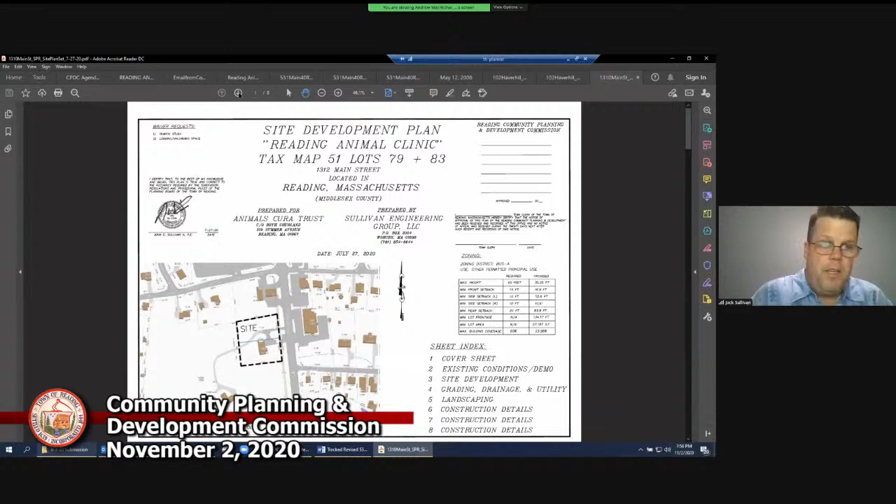Right now there's a gravel driveway that extends through the vacant lot, the northerly lot where the proposed new building is shown. That gravel driveway extends through the property and goes out to a single family home out back. The land behind this property is a totally separate property that has nothing to do with it. Beth has no ownership rights in it. She just owns these two properties in front of us.

But right now there exists an easement to allow that single family home water and sewer service through this property, and access. We need to maintain those services and that access until such point that a future development by someone else is put in. So there have been talks with the potential developer of that site, and we tried to coordinate our plan.

I think the confusion is the developer would like to run the larger water and sewer services through our site, which we accommodated an easement for. But as far as drainage, there's no drainage being combined between the lots at all. All the drainage for this site is self-contained on this property, and there's no increase in flow rates exiting this property. We need to show that pre-existing levels of flow will not be exceeded, and that's why we have on-site drainage systems to mitigate the increase in impervious surfaces and collect stormwater on our own property.

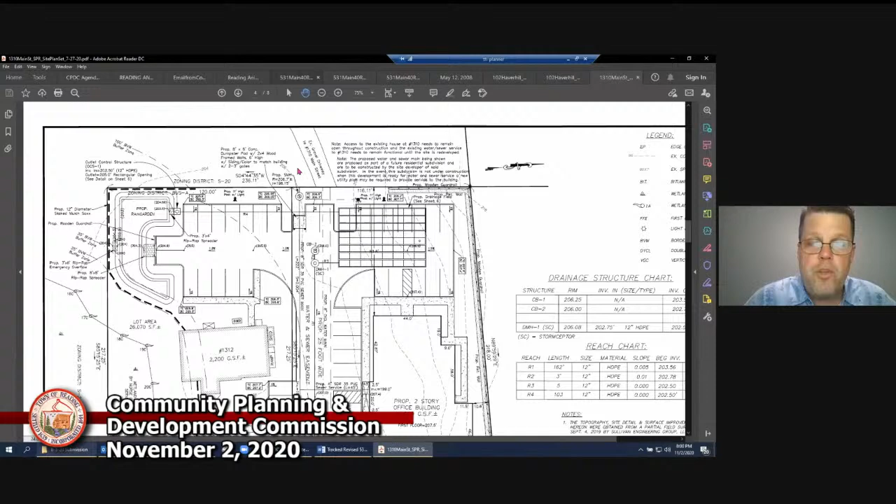Okay, so I'm sorry that I'm having a hard time understanding. Are you putting in the 8-inch water lines now or not? Not now. Only if the development gets approved in the future behind us. The developer would then put in the 8-inch water main and the 8-inch sewer line. If it does not go through, then those will not be put in. I appreciate your patience with that question. Thank you. Sure.

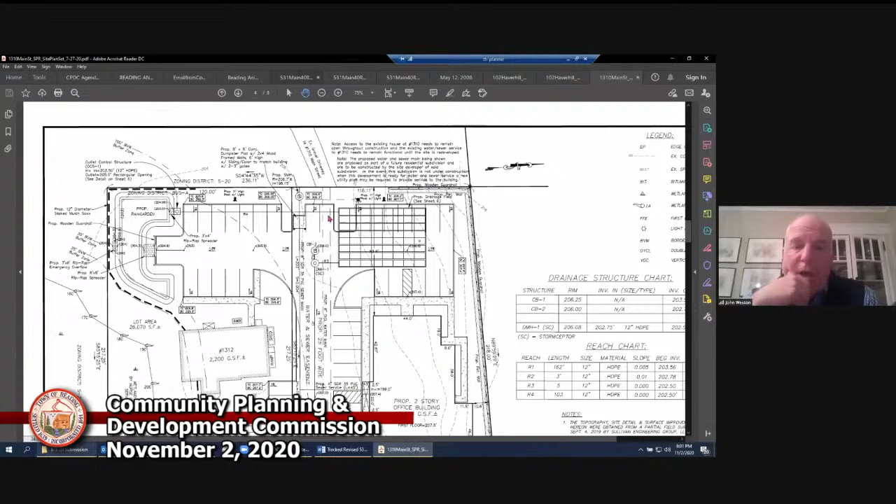Turn it back to the chairman. All right, thank you, Catherine. So, other questions? Yeah, Catherine, it's fine, right. This is a complex process, I know, especially when there's these two overlapping.

And so I'm understanding from this meeting that there is a minimum requirement of 47 parking spaces because of the zoning. It was kind of vague on whether or not the vet's clinic expected to fully use 47 parking spaces. And I did not really receive an answer on how many animals they expect to have at a time on the property. Could I get some general feedback on how many people coming and going on a daily basis, and how many animals entering and leaving on a daily basis, would be happening on the facility?

We're required to have 44 parking spaces under zoning. We're providing 45 conventional parking spaces and 2 handicap spaces, for a grand total of 47. The conventional parking spaces for everyday use will be 45, and we're required 44.

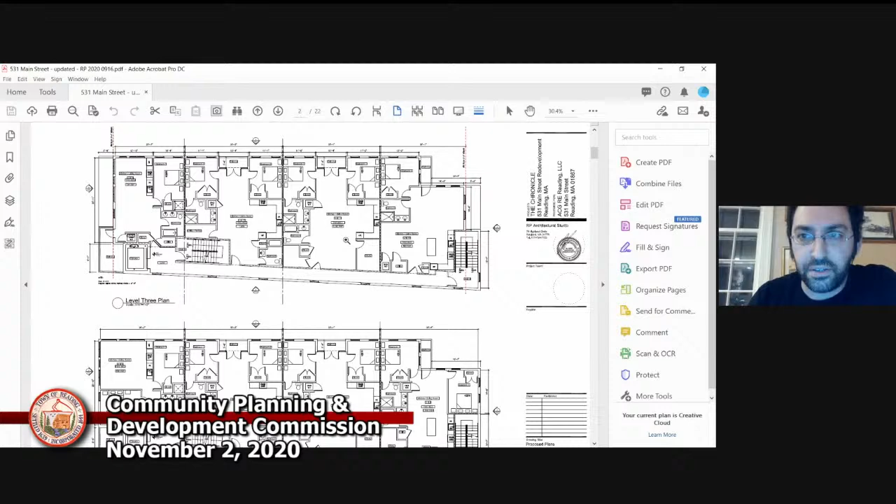This unit on the end became a large 1-bedroom, and similar to the front, we have a 1-bedroom now as opposed to 2 bedrooms. But aside from that, it's very similar. And again, as I mentioned, the 4th floor is now gone, so the building massing has been improved quite a bit.

As you can see here, we have the Chapin side elevation. So what we basically did was take off the upper floor, so now we only have 2 floors above the retail area. We brought the scale of this down a fair amount to make it more of a pedestrian scale. The aesthetics of the building are very similar - we're still having the clapboard and the reveal panel system above, but otherwise the aesthetic is very similar.

At the front elevation on this side, again similar aesthetic. We just brought this roof overhang down a bit to make this a little bit smaller scale, but again keeping a lot of the same aesthetics we had in previous schemes. Same thing on the rear - just the scale got a lot smaller, but we still have the rear patios and balconies. So similar design, just a smaller scale.

So looking at the alleyway side here, again the aesthetics are basically the same, just a smaller scale.

Moving on to some of the renderings. By taking off this upper floor, the scale of the building is much smaller than it was in the last schemes, which we think is a pretty large improvement in that regard. But overall, the design is very similar to what we showed last time.

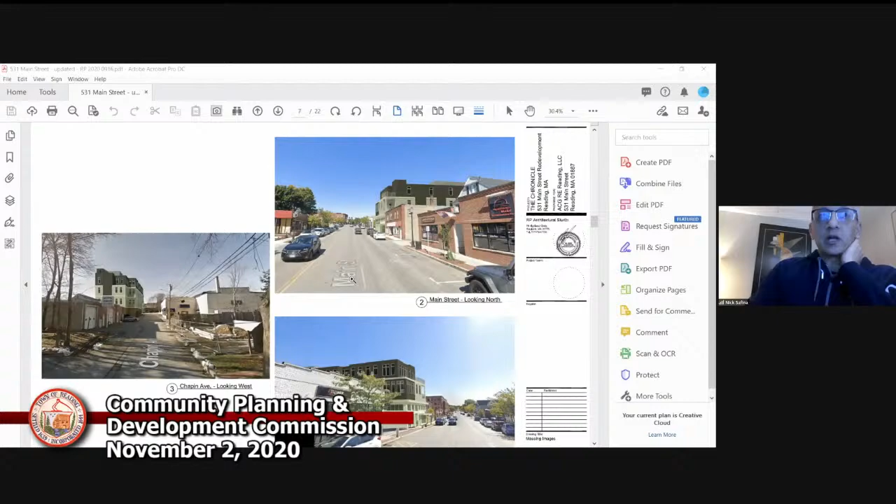Do you want me to share my screen again, Nick? Yeah, if somebody could share that. Okay, here, I'll share it. So it looks like you pulled back the building wall and you're going to have an overhang with some column supports, and that created more of an alleyway for these meters.

I'm just not sure you have code clearance in front of the meters right now, at least the way they're sketched up. The gas company said we needed 30 inches off the property line, so that's basically what we're intending there.

Well, but 30 inches off the property line doesn't give you 36 inches in front of the meter, which I think is the code required clearance, so you might have to move that wall back. That's not what they talked to me about when I was on site, but even with that said, we have room to push that wall back a little further if we need.

So if that's the case, we need 36 inches in front of that meter. We can match that. I think somebody should look at that just to be sure, so you don't get caught. Yeah, that's fine, we'll work out that detail.

And it looked like you had the bare minimum OSHA clearance between the column and the wall to get in there, at 22 inches or so. We might have to open that up a little bit, but we're pretty close. I really would like you guys to look at that to make sure you don't get caught and have to find a new home for them or make some significant change. But it looked like you did have room to move that wall left. Yeah, we have space, definitely.

My other comments are more architectural. I think I'll hold off on those until we hear from other people on more of the site planning stuff. Sure.

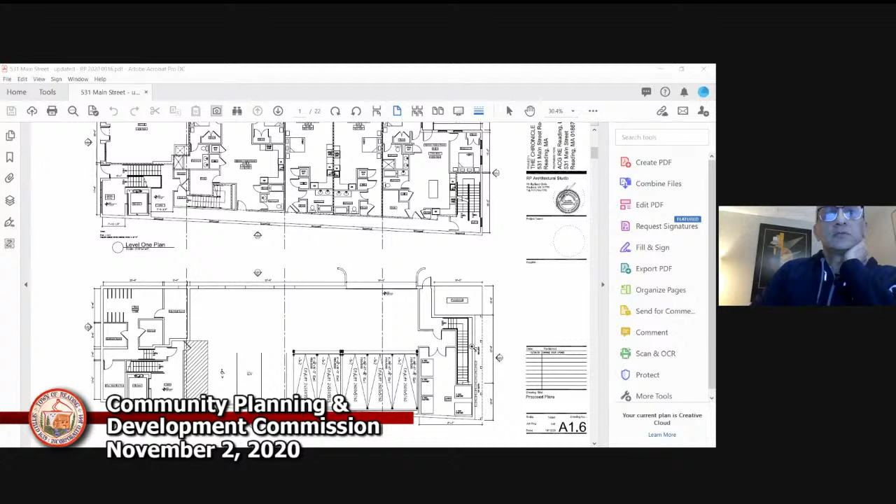Hey Ryan, I'm sorry, Aaron, could you possibly show the plan that you did of the meters? Sure, yeah, I can do a blow up. I have, let's see here.

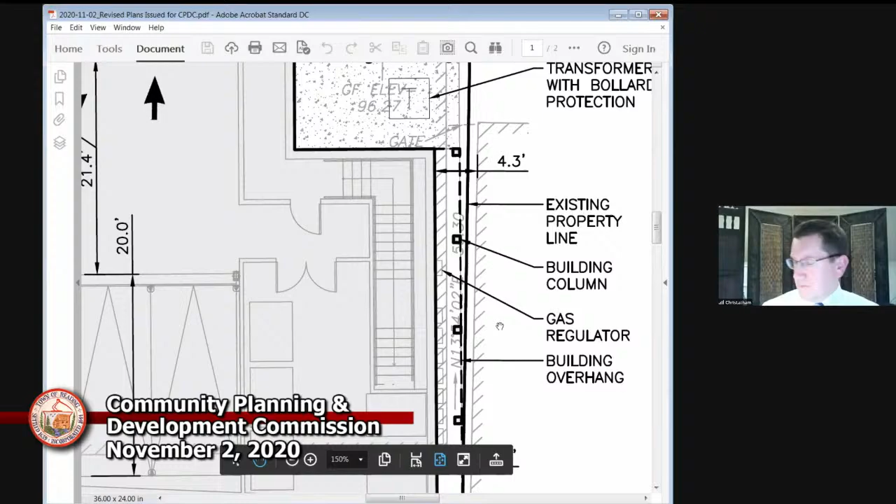There's actually, isn't there a better sketch than that? I thought, hold on. Yeah, there is, let me see. I'm trying to figure out the best way to, I'm going to try to share my screen if that's all right. Where is it? Okay, can everybody see that? Yep. Okay, Aaron, why don't you take over if you want to describe the plan.

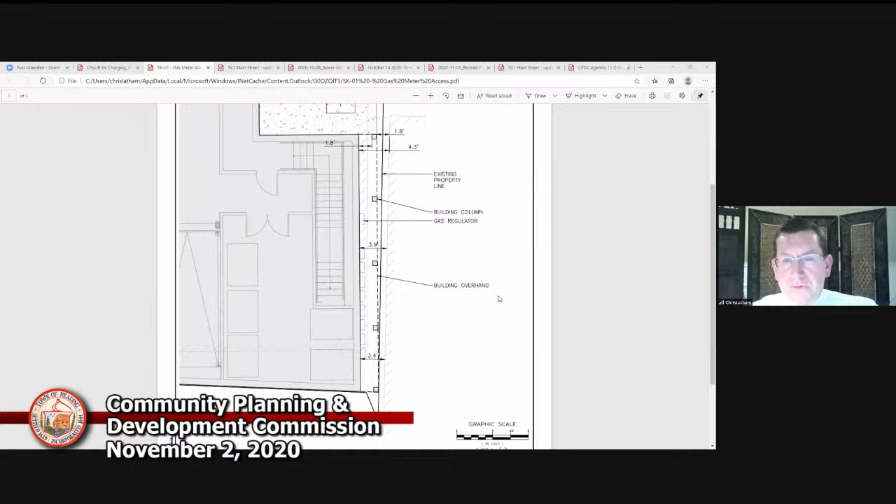Sure, yeah, we just pulled together this sketch as there was concern about the access getting back here. So we pulled some dimensions from building to building to show that you have 4.3 feet up near the transformer, and down towards the bottom of the screen, 3.4 feet at the last meter. You can see the dashed line is the building overhang line. The building columns are hatched right along that line. That's about it. The gas regulator is the first square, you can see the text called out at the gas regulator. So I think that's about it with this sketch.

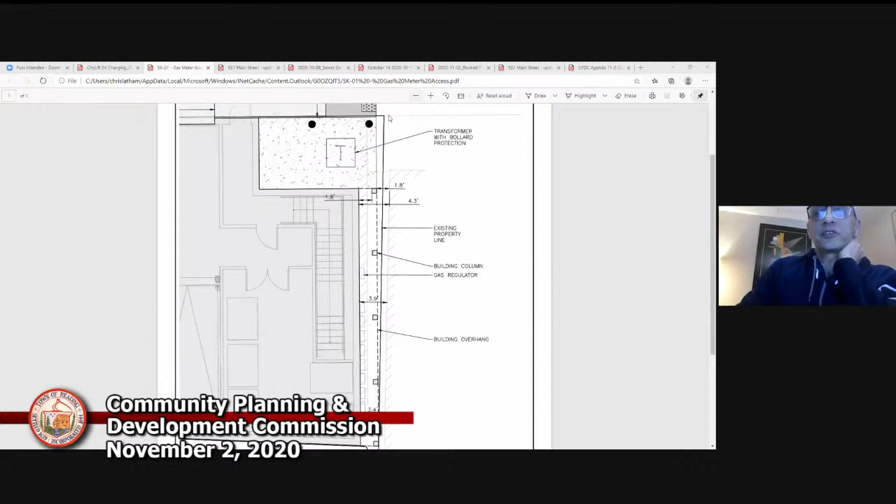So if it's 3.4 feet from building to building, and the face of the meter is almost 12 inches off the wall, how are you 3 feet from the property line? It was 30 inches from the property line, was what I was told. 2.6, yeah, but I don't know. When I read the code, it just says 36 inches. Okay, well, we'll revisit that to make sure we're accurate. But we do have space to push that wall back if need be.

Rachel, do you have comments? I think my only comment was about the street parking questions. I didn't see them addressed in this, and maybe I'm just not picking up on it. One of the things we had talked about, coming back to this, is whether we were going to consider some street parking options given the retail establishment in there. So am I just missing this because I'm not awesome with the architectural plans, or is that being dealt with separately?

Basically what we submitted is what we had. I mean, obviously we had proposed a more formalized plan, but the PTTF basically decided they didn't want that on that side of the building. They actually made a decision that they would rather have less parking and less loading zones. They want more sidewalk, so we're sort of stuck. I mean, obviously we have the zoning bylaw, with Julie's suggestion we moved the EV space onto the CityLift. We added an extra electric vehicle charger, which opens up one additional standard regular parking space inside the garage. So we are incorporating that for that commercial space. So I think that's frankly the best we can do. We downsized the size of the commercial space.

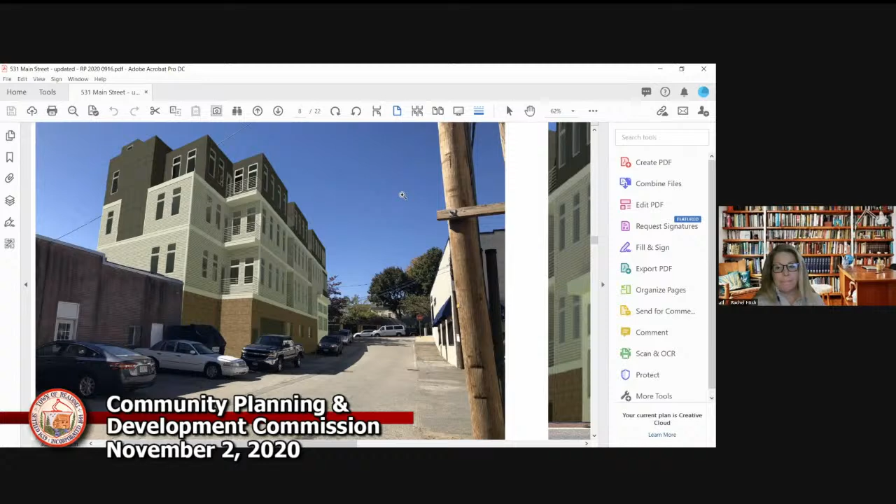Well, let's think on that. Come back to it.

Other thoughts? Mr. Chairman, while we're on parking - how many spaces do you say the city lift is going to generate? That would basically be 13 parking stalls with the CityLift.

All right, so the 3x3 would generate 8, and the 2x3 would generate another 5, 13, okay. I just wanted to make sure you weren't counting that extra space, because it looks like they're two technically independent CityLift systems, each one requiring an empty spot to be able to function. That's correct - the 2x3 has 5, 1 less than 6, and the 3x3 has 8, 1 less than 9, for a total of 13 stalls.

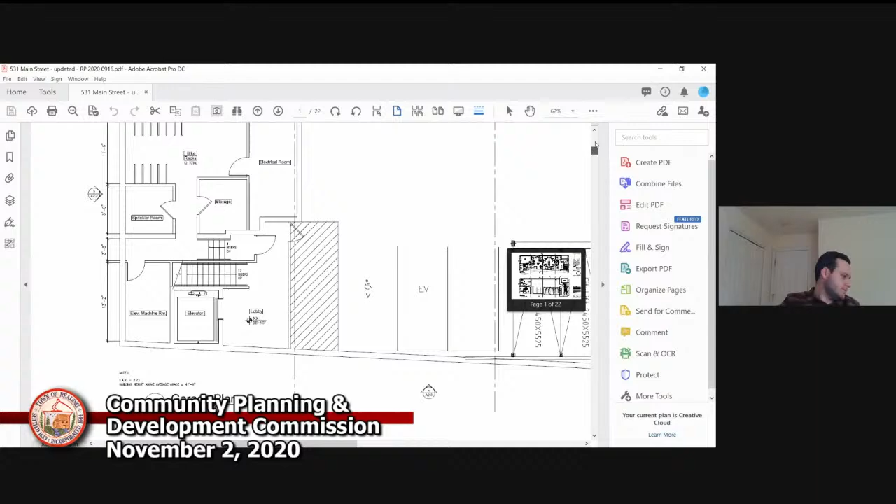Okay, thank you. And if we could go back to the gas meters for a moment, on the SK-01, if what I saw was that the opening is 1.8 feet on both sides of the column, was that correct? I believe so, yeah.

So to get in, you're going to have to go onto the other property. Is that what you're saying? Potentially, yes. Like I mentioned before, we do have room to make that wider, so I think we can increase that opening so no one has to walk on the other property to get to the gas meter. Okay, because that's a very small opening, 1.8 feet. Yeah, no, I understand. Okay, I guess.

And while it hasn't been brought up yet, when this is all said and done, would it be possible to get a shadow plan of the new building with the new height? Yeah, I actually included that in this drawings package. I think it was the last sheet of the original package that was sent through. I could bring it up if you'd like to see it. If you can, for the group. Yeah, sure.

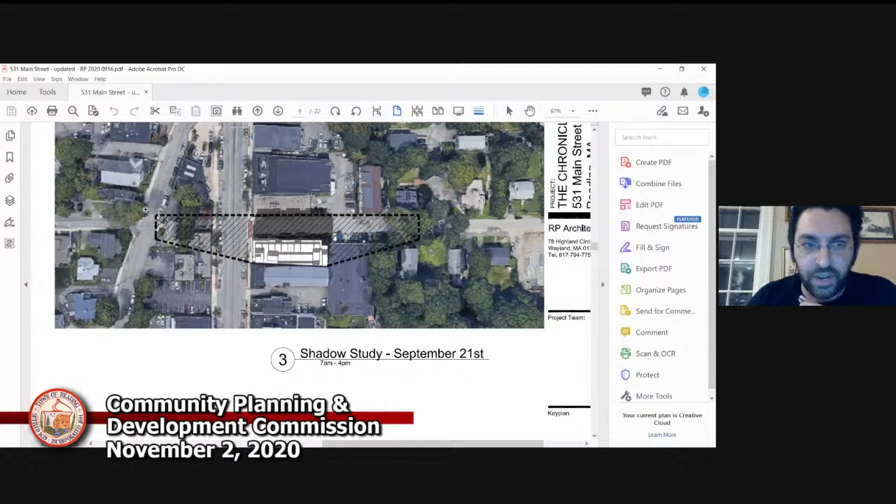You've cut out, can you hear me now? Yep, okay. So I was just saying, when we took off the 5th floor, we lost some shadow along this area for all these different times of the year. So we saw some improvement overall. You've cut out again, it's very difficult to hear you. Sorry about that, can you hear me better now? Yes, okay.

So anyway, I was just summarizing that with the 5th floor taken off, all these shadow studies improved. The overall footprints are very similar to what was originally submitted. But as was brought up by the neighbor last time, the building across the street is still going to have shadow on it because we're tall enough to be over that building, which is fairly close.

Okay, thank you. I have another question, and in addition to the parking concerns, I don't know the answer to that, so I'm glad the task force will take another look at that. I like what you've done to soften up the streetscape, the main street side a bit.

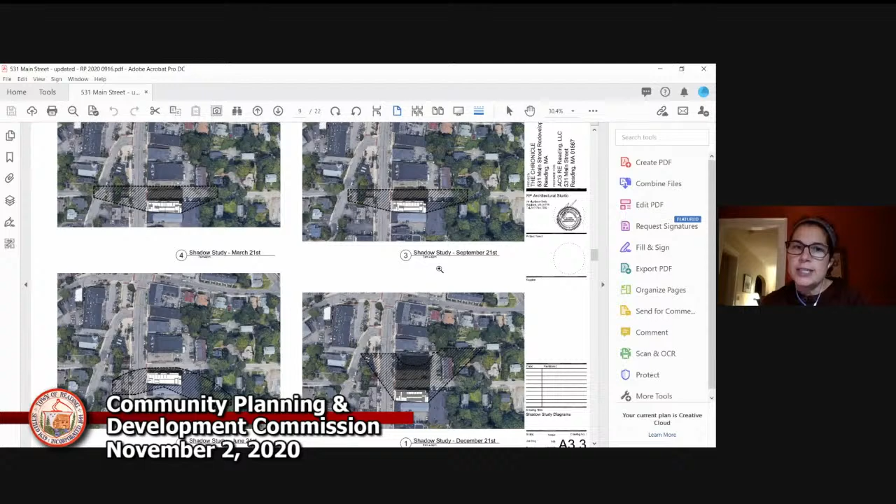Different question. A few meetings ago, we discussed whether the retail space could accommodate equipment, hoods, etc., that would be necessary to have food service be an option if there were going to be a small cafe or something like that. Is that incorporated into this design? Yes, we did incorporate a shaft space for an exhaust, so you could have a cooking space in there for the hood. That's basically this X area here, and it would run up to the roof, so we considered that.

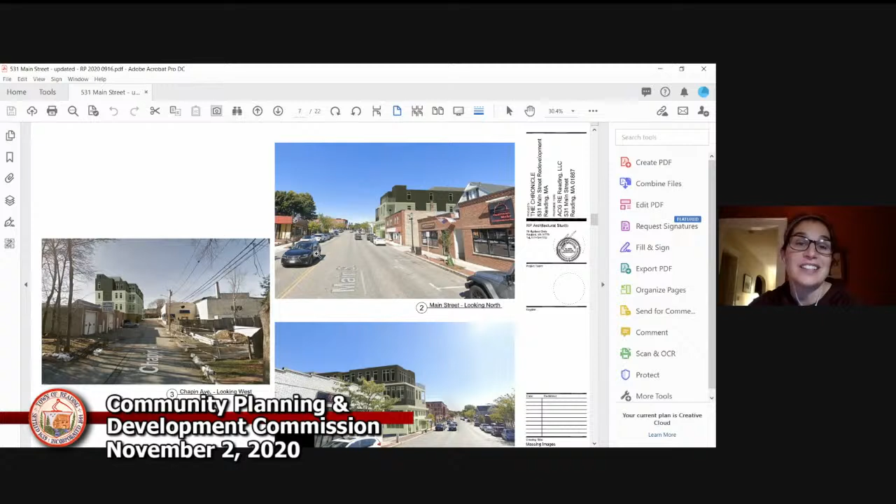I do appreciate how you've softened up the Main Street side. I'm still really concerned, I don't know the answer to it, about that long, relatively uninterrupted big length on the Chapin Avenue side. With the renderings, which I appreciate you did, it's still very much the dominant feature on that portion of the street for quite a stretch. I've been looking at this and I don't know if there's anything else that can be done, but it's still really big from that one view and very dominant.

You're talking about this elevation? Yes. Yeah, I mean, we've broken it up with the balconies and tried to use different materials to bring the scale down. But it is a 4-story building.

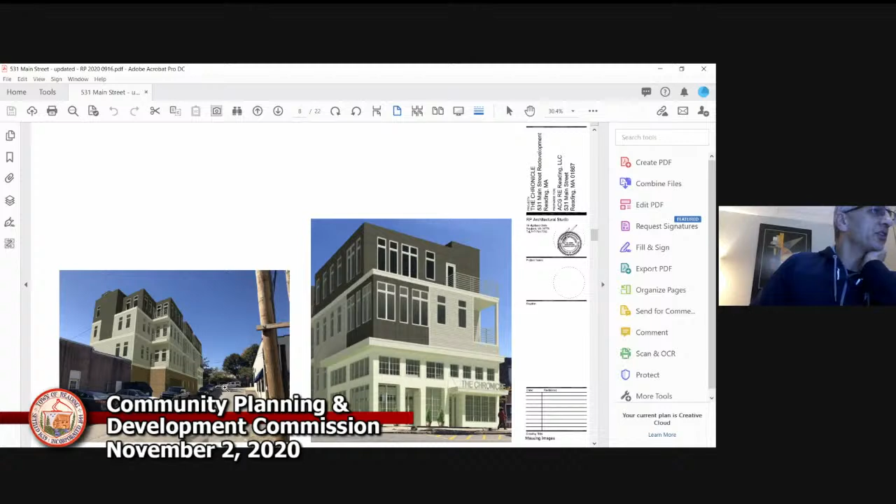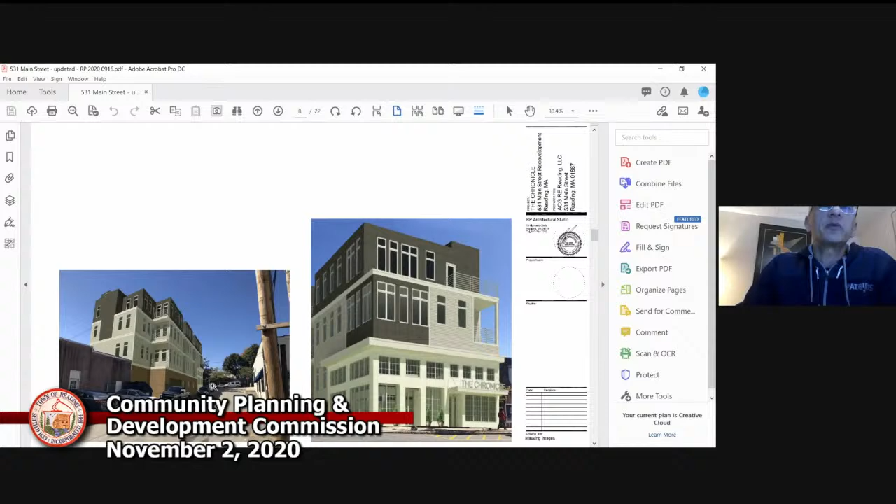One thing you might consider there is the balcony areas that have the recesses - it looks like they're recessed. Correct, they're recessed, yep. So you could either darken those elements up or push them back further. You might want to continue that recess slightly into the brick below so that's not a long face. I think what's happening is those balconies, especially the top one, in the rendering, if you zoom in, because it's not recessed significantly, it's reading like a big long band. But yeah, sure, we can steal some space there and push those in to get them off the street a little bit. Also, if you change the color of the band across the face of the balcony, it'll stop the continuous length we're perceiving. Sure, you can look at that as well.

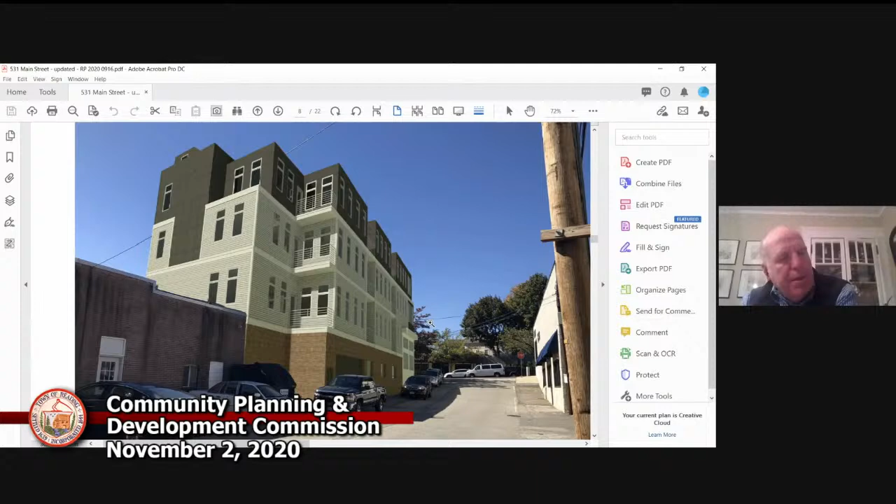So can we talk about the height? A couple of things. One is I see on your plan set, I think the top elevation numbers are wrong. They don't calculate quite right. So you'll want to take a look at that.

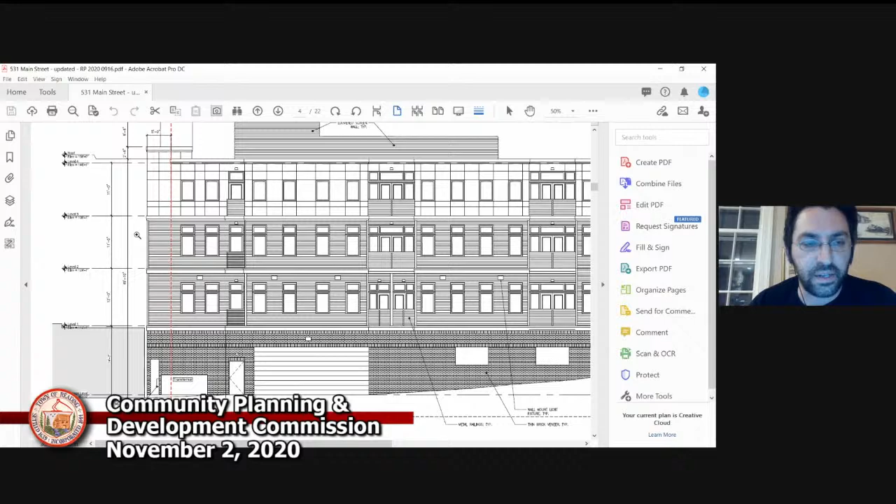Right, because you're showing it at elevation 158 or something like that, and I know that's not right. Oh, these numbers, yeah, maybe. Yeah, the actual dimension itself is accurate, but that might not have carried over. So I guess, first of all...

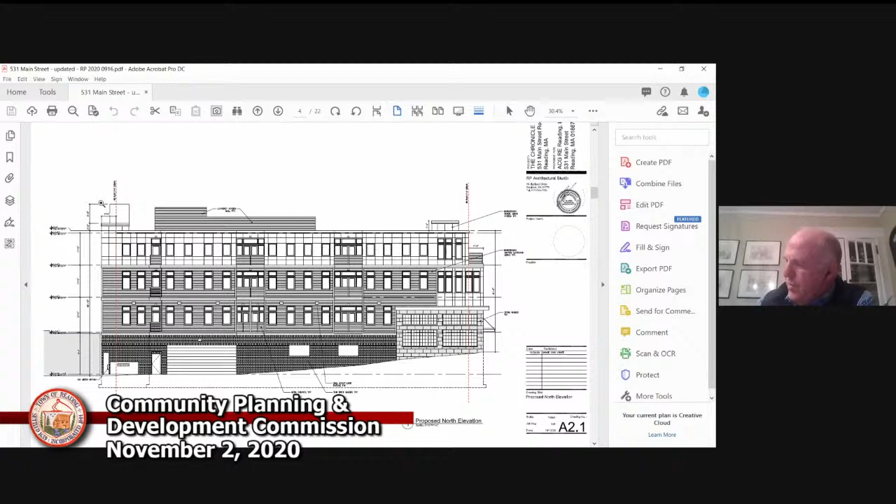understanding how you calculated the average grade. I guess, so that I'm not beating around the bush, I'm still concerned. I mean, obviously you lopped off a story, which is huge, but you aren't even in the ballpark, as I've said both meetings, that you weren't in the ballpark the first two times around. I'm still concerned over the height because the way I see this, at one corner you're still at 58 feet above grade, above the corner grade, right?

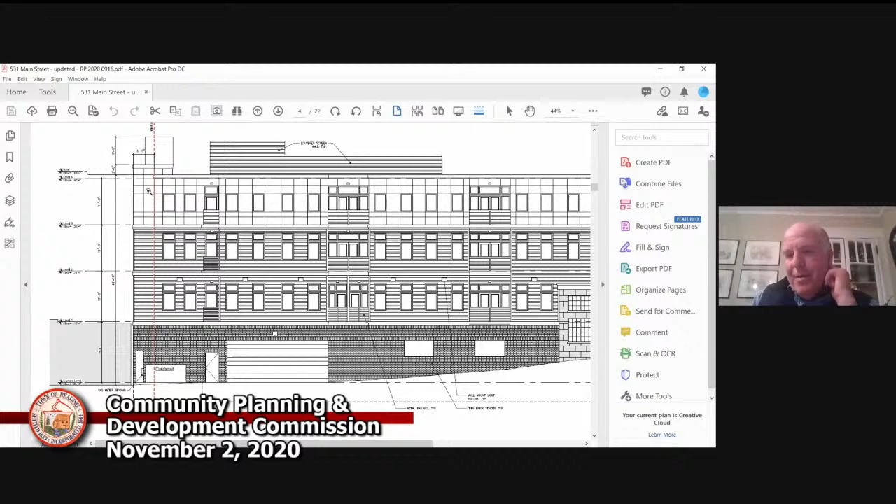At the lowest grade. The lowest corner is on the rear by the transformer. Yeah, to the top of the living space is 49. No, the top of the building. And so I think that's where we need to work that out. The way we define building height isn't necessarily to the top of the living space.

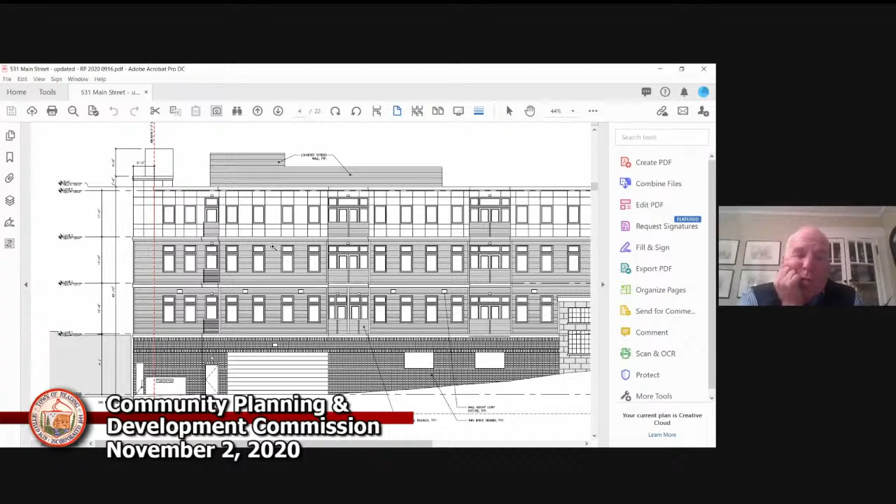So Chris, if you can go back and look at the definitions in the zoning, we do include parapets in the definition of building height. What we don't include is like elevator shafts or what have you, right in the center. But when I look at this, because of the way you've designed this, if you show a different one of the elevations, the building facade is right, it isn't interrupted in some of the...

That building facade is not interrupted at the top. This is setback, this is setback, this is not setback, right? Stair is not at the... and so that's what we're looking at, right? That's what I'm looking at. I'm looking at that's 58 feet from that grade to the top of that facade.

Now, understanding that's not the way we measure, we measure from average grade, which is why I first asked for clarification of how you got to that average grade. Was it the four corners, or taking the perimeter in CAD, or what have you? So I'm still concerned about the elevation, because it's still above our 45 feet, even at 47.

But because of the way the design is, to me it even looks like in some places it's another story above that, right? 58 feet. So, you know, I'm concerned about that.

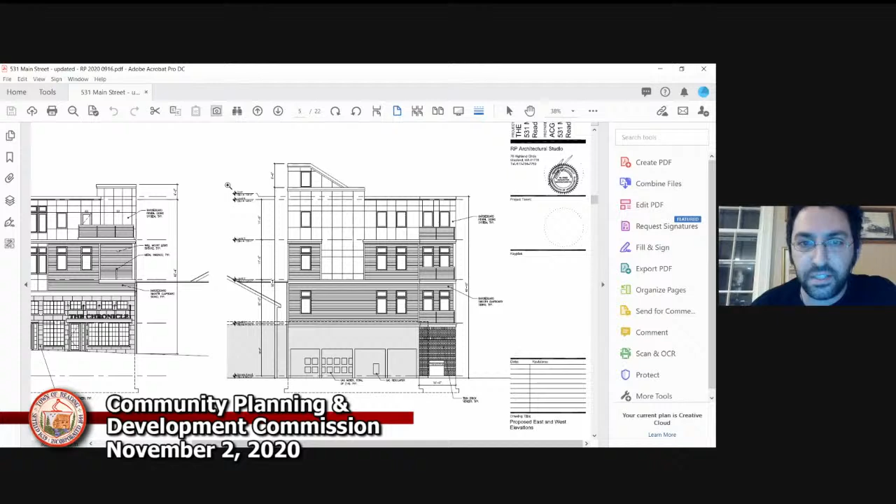I mean, we've met the setback requirements at that top floor, I just want to point that out. And yeah, we are certainly over the height, but in most of the locations we're very close to it or under it, depending on the grade. The only spots where we're really quite a bit over it is just at this stair area in the rear corner. Or the front, it's 2 or 3 feet, but on the front elevation too, in that corner, right?

Yeah, the one that you can see right there. Yeah, we're slightly over. That's set back quite a bit from the street. Yeah, it is over.

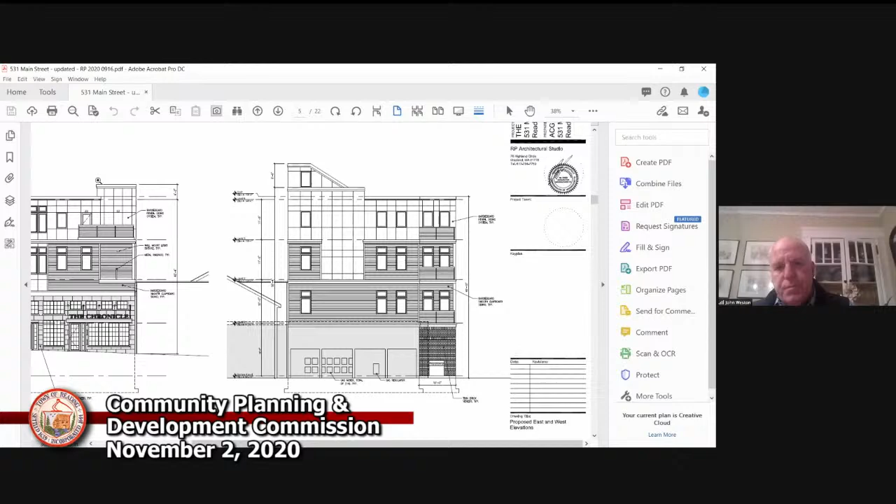But it's pretty... one thing I think you might want to look at, I'm just kind of playing around with it here, but if you look at the rendering, the dark top color, I actually think is making it feel heavier than if you had two stories of a darker color and a lighter top story. Yeah, we can take a look at that. Certainly open to it, because right now the emphasis is really being punched by that dark piece.

I think anyways, I mean, I just kind of screwed around with it and I thought it sort of brought the second story down a little bit when you reverse it. And I'm not sure I see what you're saying. Yeah, something to experiment with maybe.

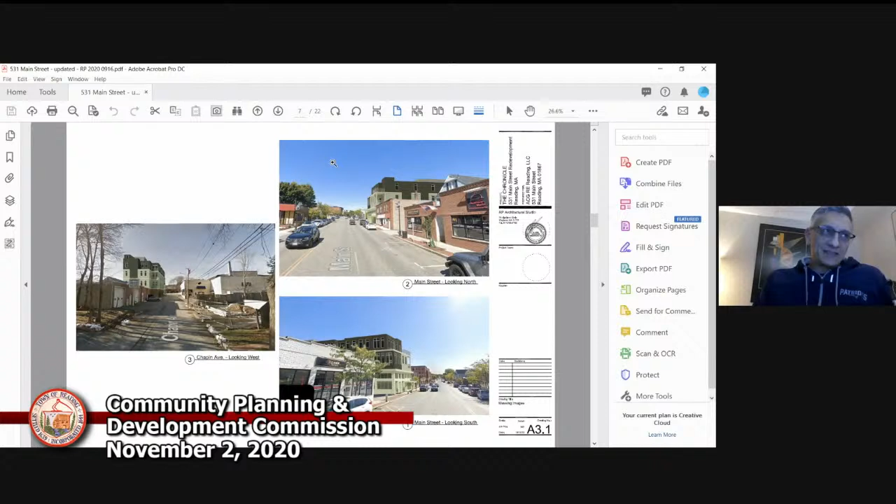I think the front elevation, I think the massing is right. But for me, there's so much going on. I see what you're trying to do, you're trying to break up the mass. You broke it up both formally, with the actual setbacks, and then there's these changes in materials. When you look down the streetscape, not that there's much going on there, but it's hard to get something continuous. I can't explain this piece of it. The massing is correct, but I think all the different materials make it lose cohesiveness as a facade of one building. There's a lot going on there.

I'm not sure what the remedy is. The bottom is pretty continuous, bottom story and a half, and then you've got these three different pieces up top. Maybe perhaps trying to improve the second floor with the panel system coming down is what's throwing you off. The right side of it just feels very seacoast, with the balconies, the material, and the proportion of those windows. I'm just not sure. I think that somehow, now that you've broken up the mass, you could probably have a continuous facade there with the breakup in the balconies and maybe some changes in windows. Maybe that would work, I don't know. There's just so much going on there, I couldn't figure it out.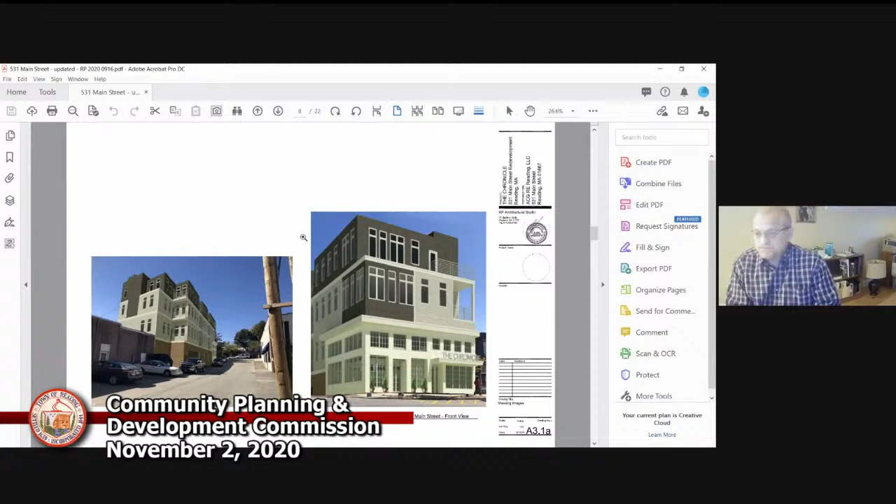Thank you. Thanks, Art.

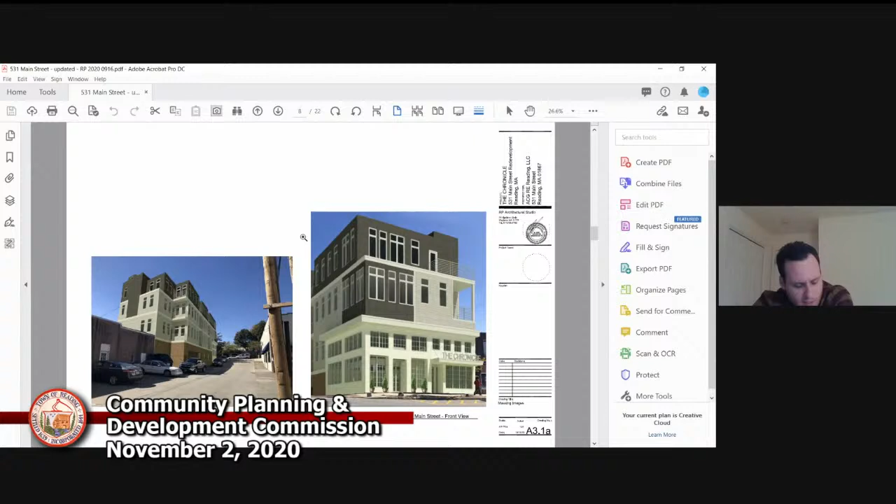Did we get any feedback from the fire department, or do we know? Right, we must know what those turning radiuses are. John, I did take a look. In the last set we provided, we studied out that turn coming off Main Street to Chapin. I can pull that up if you'd like to take a look. Yeah, I'll stop sharing. We just clarified too that the building itself is not cutting down the radius, it's whatever we end up doing with the sidewalk and or parking, right? Thank you, yeah, that's a good point.

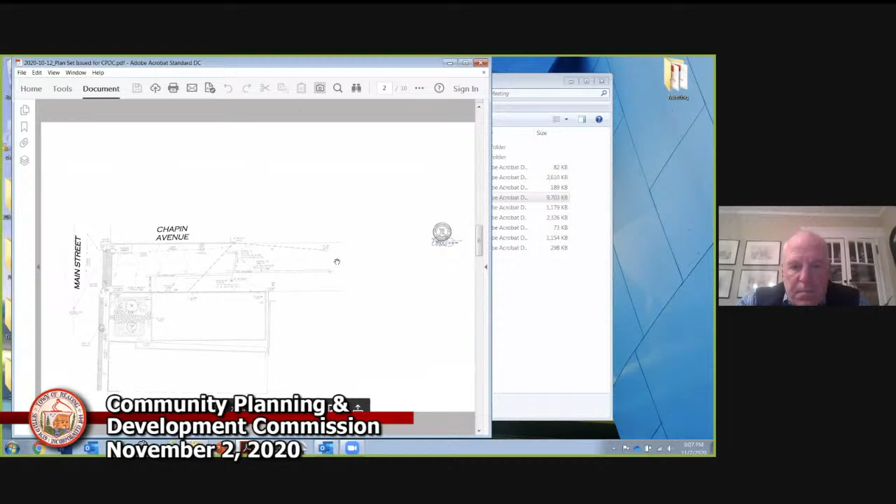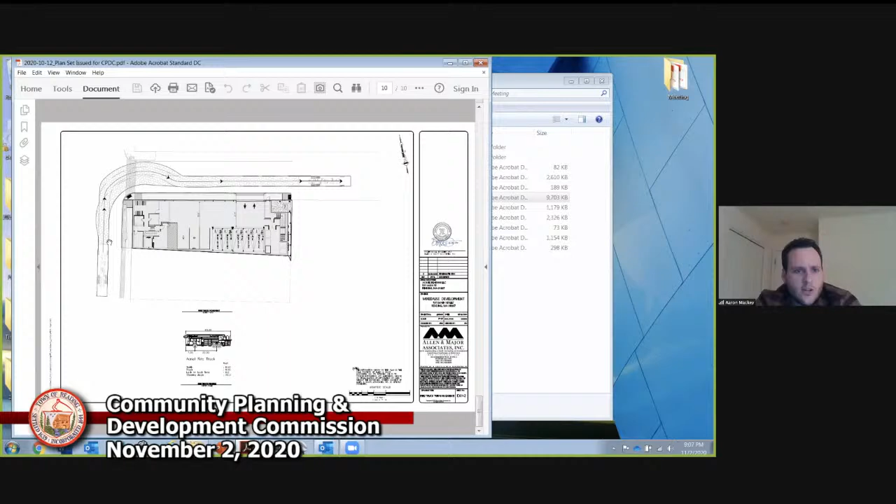So in this condition, the sidewalk is just being replaced in kind at the corner, and the fire truck has no problem making this swing. As Nick said, the building going up to the property line extents won't have any effect on the turning movement here.

All right, thank you. I guess the other point that ought to be a concern of yours is on the parking. Certainly, as we discussed before, there's parking required by zoning, but you shouldn't be taking the Reading zoning bylaw as what you need to gauge demand from your development. Right, we tried to be as lenient as we thought we could, so that we don't restrict development. But you've got to market your spaces, especially in the winter.

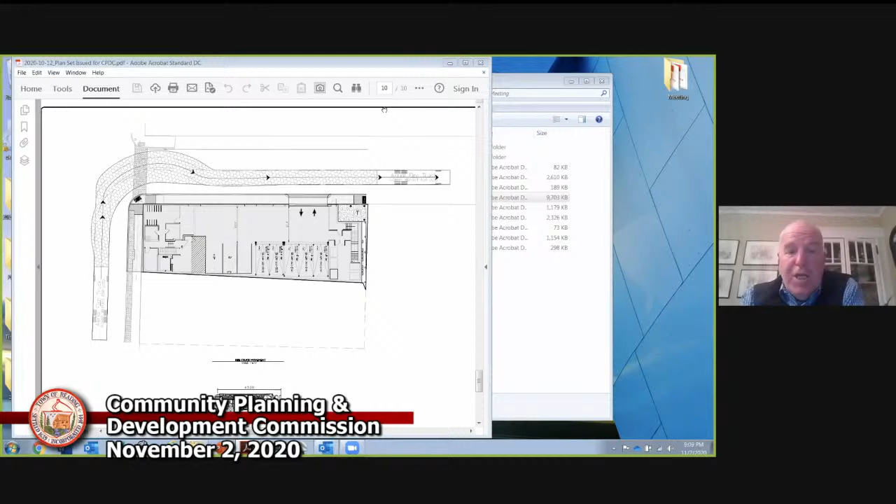There is no parking on the street, so you're going to have to sell these units. So I guess what is your thinking about the demand, or do we have that, of what the demand would be for the units? Because some of these I'm trying to look through here - some of these are greater than 2-bedroom units. You've got a couple of 3-bedrooms in here.

No, change the mix - no. Actually, in addition to chopping off that other floor, we've actually reduced the density by going from strictly 2-bedroom units, previously there were some 3s in there. Now we've got 2s, 1s, and studios. So in fact the density has dramatically decreased. Okay, yeah, I thought I still saw some 3s in there.

No. So that's why we felt that by adding that additional parking space that wasn't necessarily mandated by the bylaws, you pointed out, we figured that would be helpful. And we in fact end up with more than 1 parking space per unit. So to Art's point, there is actually more than 1 parking space per unit in the building - it's not 1 per unit.

And in terms of the market and what we potentially see, obviously this building, given the proximity to the train, we foresee that a lot of the tenants are likely probably not even going to need parking. But that's neither here nor there, right?

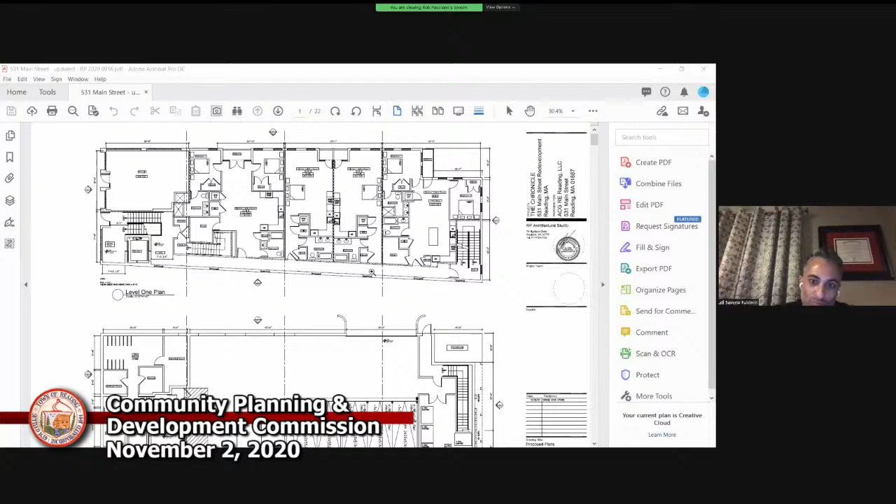So this is a queen size bed up here. You could potentially cram one in this one, wouldn't be very comfortable. Maybe a twin, a cot. Yeah, a twin, I mean you could, but there is no closet or anything like that. No closet, no windows, it would be illegal for them to do that.

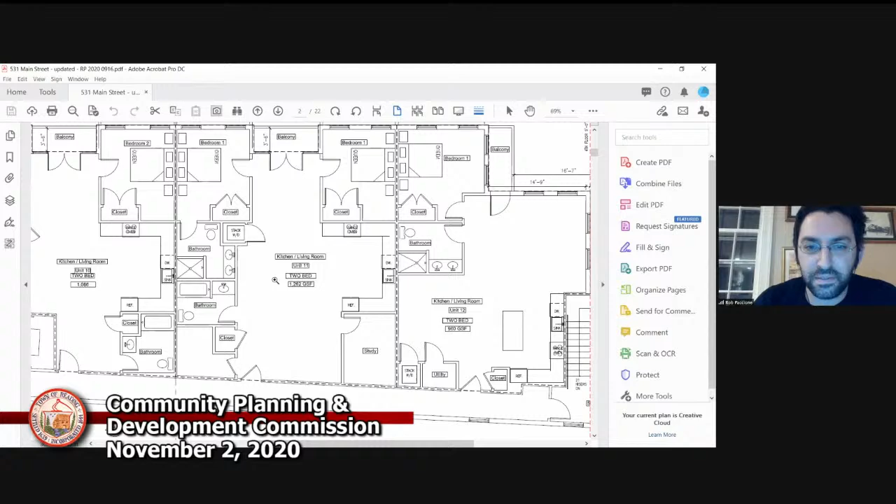Okay, thank you. So there are balconies on Chapin Avenue, and they're going to be looking right down on us. And who knows what, everybody puts all sorts of things on their balcony. So we will have restrictions in place in their leases so that they cannot put stuff like that out there. We'll definitely address that, Jill, for sure.

Stuff like what scenario, are you talking about grills or loose things? Exactly, hanging towels and laundry out to dry and all that crazy stuff. Yep, exactly, we'll address all of that in the leases themselves in writing.

Do you intend on being the, what would it be, landlord? Are you going to, I think you're coming in and out a little bit, I can't quite hear you. He's asking if you're going to be the property manager, landlord. I mean, that would be the intention. Yeah, hopefully, right? If we get approved. Okay.

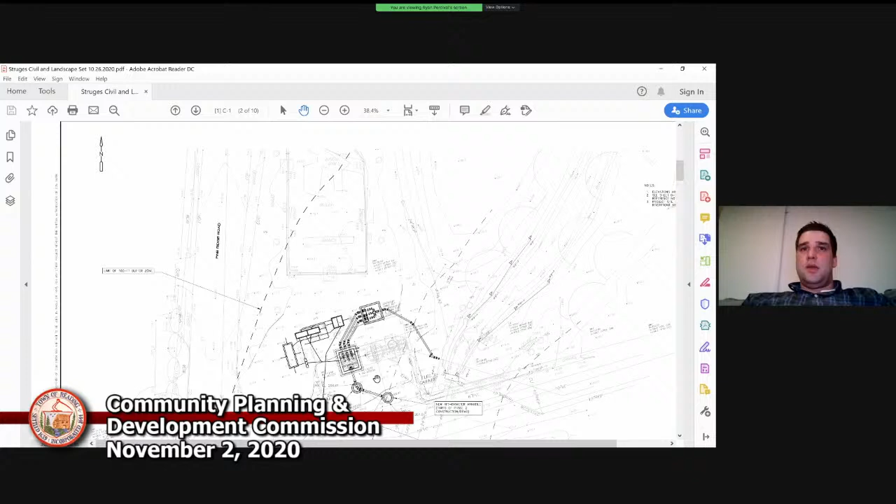The backup generator will be placed in this area here, which we currently do not have, and we do need it for redundancy. It's important to note that this pump station was built in 1964. It serves probably about 550 or 520 homes and about 35,000 feet of pipe, so it's the 2nd largest pump station in town.

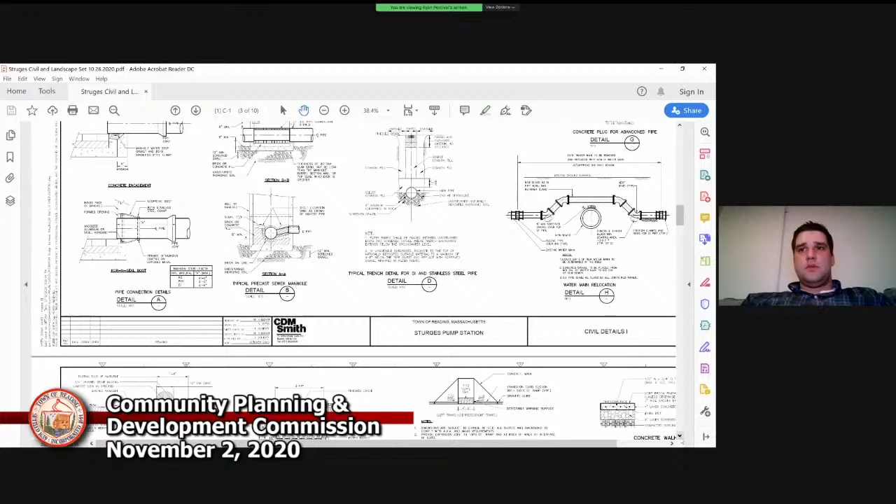This is really the one that probably makes more sense for everyone to look at, so we'll get right to it. Again, we're really here for the pole, for the scenic way, but I felt it'd be nice to go over the whole project so everyone can understand what's going on.

The pole in question that we would need to place is right here, and that's been determined by Reading Light and Verizon for loading purposes. They need to place that pole there so they can come down with a riser and go underground to our control and power station. So that would be the location of the pole. Full disclosure, I will tell you that this pole was actually just because of a work order issue in Verizon.

They actually placed that pole a couple days ago, realized what they did, and removed it. It was there for less than 24 hours. I just figured full disclosure since we're in a public meeting. So currently it's not there. They did recognize they made a mistake. They had another pole they had to put in up the road, and they crossed their work orders. That's what happened. So they removed it and made it right.

So Ryan, what kind of pole are we talking about? A standard telephone pole. It will be in line with the overhead wires that are currently there, and then there'll be no overhead wires going from the pole to the station itself. Everything will be down through a riser into the ground from that pole.

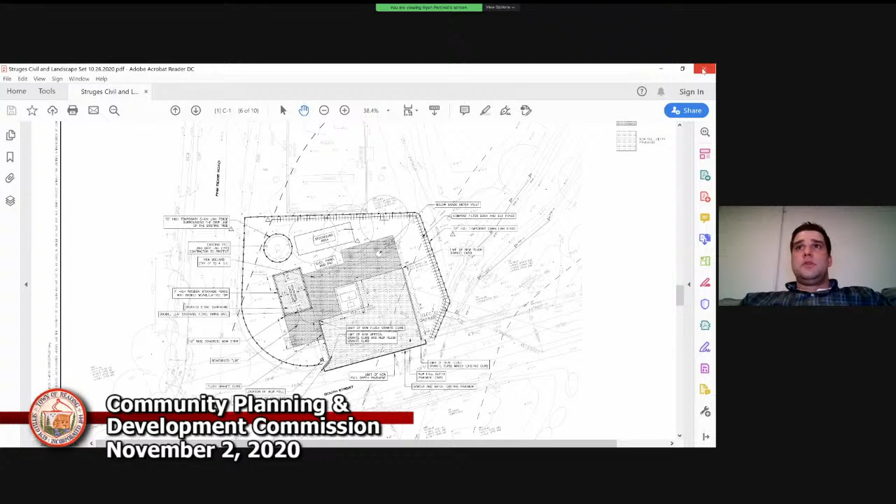And I do have a rendering of that generator enclosure that looks similar to the Charles Street pump station. I think you guys had looked at that before. Yep, we did look at that. So I can skip to that rendering if you'd like to see it. Sure, let's do that. Okay, let me reshare the screen.

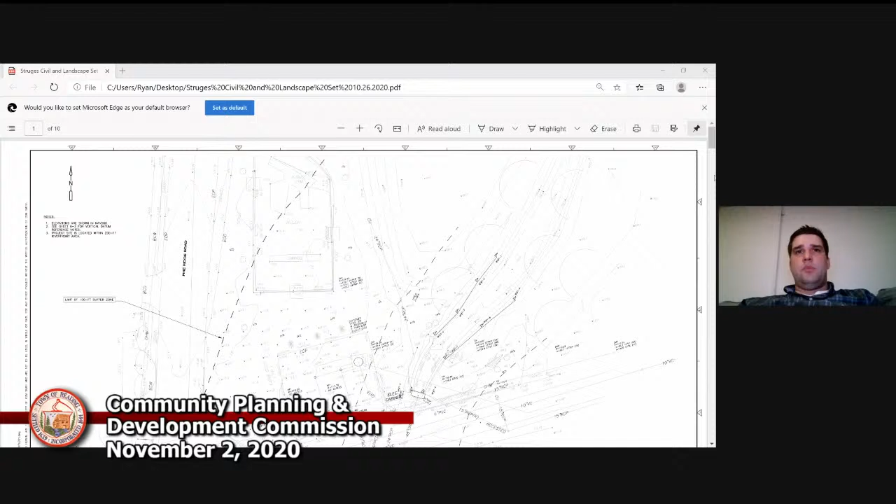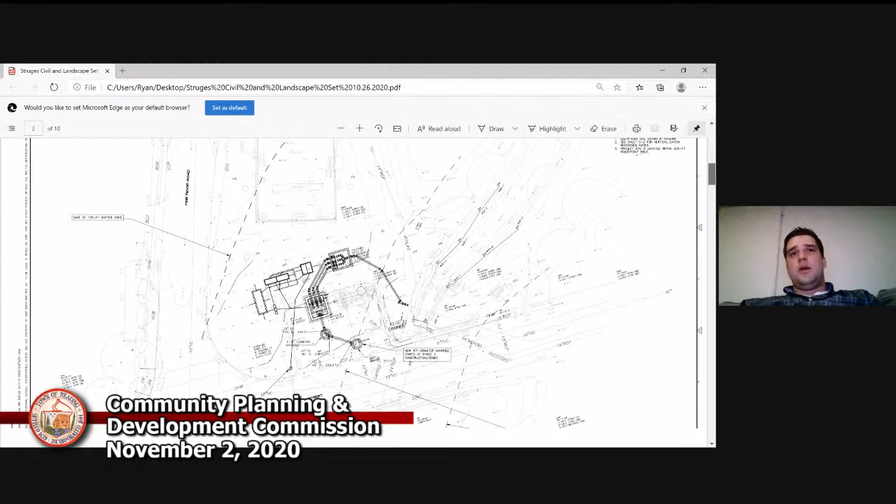That would be the reason. I can't zoom in, but what you're looking at here—apologies for these pop-ups—is all the underground piping coming from this manhole, into the new pump station, out through a valve vault, back down and around, and connecting up to the force main that comes under. We also have a culvert that comes across the street here, so to cross all this, we wouldn't be able to do. So the pole would have to go here, and then everything goes underground from those less dark lines in a spider web of conduit.

So I guess the only question I have left, hearing Jonathan and the concern about the adverse impact—it sounds like pretty important equipment. What's the alternative? Is there an in-between?

I don't think so. The generator certainly has to be placed above ground. We don't really want to put it any closer to the riverfront. We don't want to put it any closer to the playground. We don't want to put it any closer to the corner because we'll have sighting issues, which we already have, a sight triangle issue. So this has become a permanent stop now, which is effectively acting that way. It's just an official stop now.

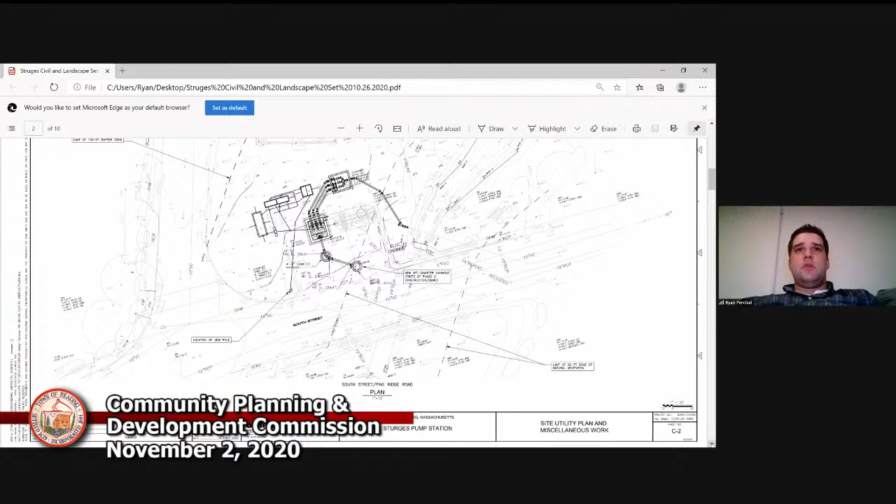Ryan, is this plan accurate? Because I'm looking at the generator placement. The rendering is very different for the panels up on the north. Let me go down. So that's the below ground. This would be the one. Okay, all right, so that's probably a little bit more accurate, Nick.

So this would be the concrete pad for the vault. This is the paved area. The hatched area is that reinforced turf that's going to look like grass. And then the larger enclosure, that rectangle, is going to be basically the fence, the crushed stone on the inside, and then you'll actually see the generator pad, which is substantially smaller than the enclosure, but because of requirements for electrical code and things like that, we need the clearance around there with the fence.

Yeah, and that's what I was getting at, is that this plan and the previous plan are different. And if the electrical panels only take up what you're showing here, then you can get the enclosure around that generator. But on that previous plan, you can't put this generator enclosure around it because it looked like some of the electrical panels were in the way.

Yeah, and so CDM has brought up the fact that the VFDs may need air conditioning. I don't think they're going to, but if they do, there's a thought of whether or not that has to be enclosed with a fence. I've pushed them into the direction of no more fencing. I don't want any more fencing up there. So I don't think we're going to need the air conditioning unit on the outside of the panels.

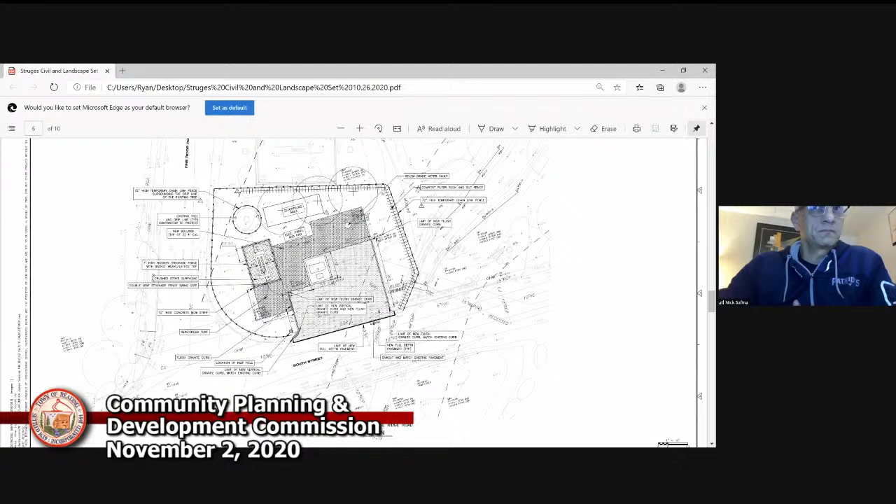Okay. Jonathan? Yeah, thanks. Thank you, John.

I apologize about my comments, and perhaps they've left a bit of an awkward feeling here, and I guess I don't know whether it's going to make it more or less awkward, but I'm not speaking for necessarily the rest of the Historical Commission, because we didn't discuss this in the context of the other changes that Ryan has presented here.

So I guess all I would say is just my own immediate reaction is that corner there, and I just took a look while you were talking at a photo that we took, Ryan, just after, I think you might have sent it around, of that corner after the pole had been removed that they put up there. And looking at that corner, with the stand of trees that I was describing, as well as the stand of trees that are on that corner, and I can appreciate and respect people's opinions about white pines, but my point is that particular corner was a very peaceful and serene natural setting of landscape area and trees.

And I think from the standpoint of the scenic road language and regulations, that's exactly the kind of character that the scenic road bylaw and the scenic road regulations was seeking to address. So I guess what I'm saying is, given the changes that are contemplated, and I see that there's not any going back on that, and I understand that, but given those changes, they are so dramatic, I'm just giving you my opinion, that the question about whether or not the pole presents an adverse impact pales literally in comparison to the significant change in that area, in that scenic, natural, serene setting, so much that I'm not even sure that if we were to present that back to the Historical Commission, whether they would even have any concerns about the pole, because the other changes are so dramatic that it almost makes the discussion about the application of the scenic aspect of that becomes almost moot.

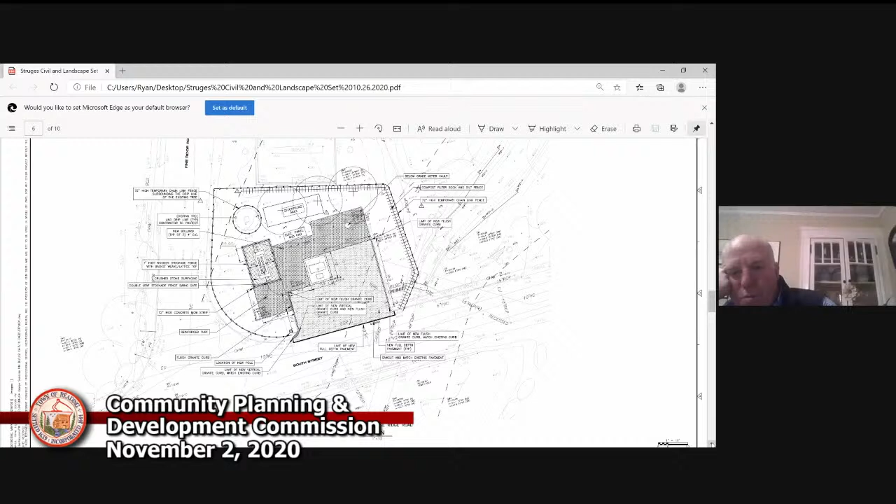I think any little thing that might serve to soften it would be helpful. We'd be happy to do whatever we need to do to soften that area. Again, I mentioned we had 3 trees there. We'll be working with the tree warden to place as many trees as we need to soften that area. I can go down to the planting plan so everyone can see.

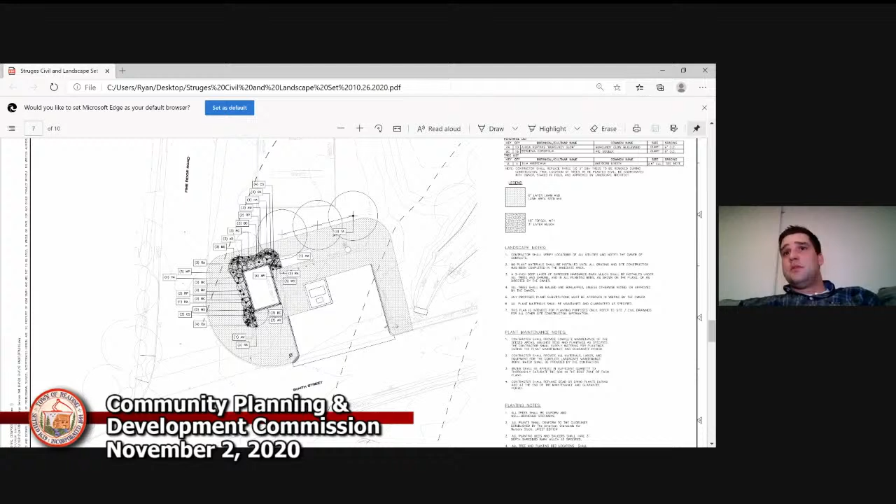There is a large area around the back and the front, so the doors really are in the front. I can talk to see whether or not we can have those doors on the side and then plant in the front of that. I don't want to promise anything, but I will look to try to soften that area up as much as I can. I don't want to take away from the park area, but we're not changing the use on that piece.

There's an underground pump station that's there now. We're bringing this up to standard and actually reducing our carbon footprint by going to VFDs, so that's important to know. We're trying to make some improvements, a lot of improvements I would say, to this area. And Ryan, that generator is going to change that look for sure, but it is needed for that station.

Is there space without interfering with utilities underground or the wires above ground to maybe even add another tree or two? I guess it would be over on the Pine Ridge roadside, not where the pole is, of course. I'm just thinking about additional softening since there's going to be additional hardening.

I don't know, you mean in this area over in here? Yeah, we'll certainly look to see if we can place anything in this area. I'll talk with the tree warden. I also want to really just keep in mind, I want to make sure I keep sight distances. I think we should be fine if everything's planted behind this area up in here. Down in here, I don't know if I'd want to plant anything that's going to obstruct a driver's view.

Understood. But to your point, again, this is a park. We are committed to leaving it somewhat nicer than it was before. I know there is a change, and we're aware of that. So I know this was just for the pole, but I wanted to make sure everyone was aware of what was going on at this project. Thank you.

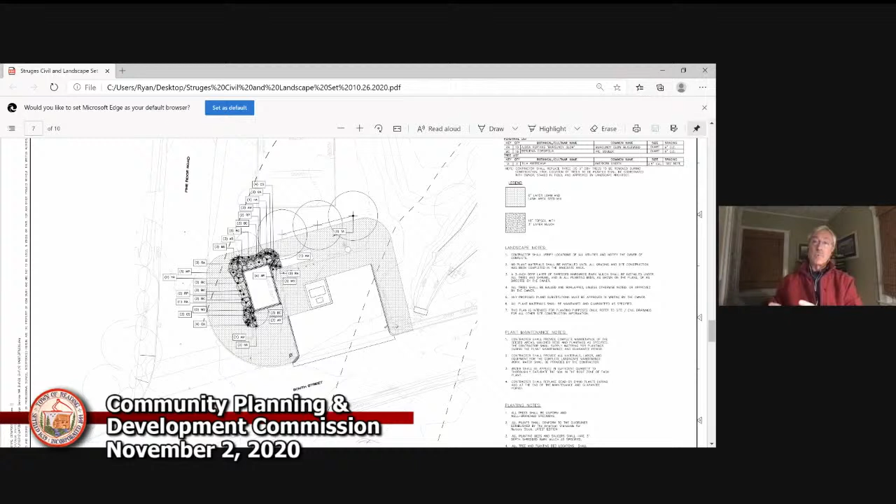So I just wanted to mention that what defines a scenic road isn't necessarily limited specifically to what's in the roadway, but what actually is in the vista seen from the roadway. It is in fact work that's being contemplated in the roadway and the degree to which it affects that, but the consideration isn't limited to just what's in the immediate roadway, but what's actually in that more extended vista, just for future considerations.

Understood, great. Thank you. Understood, thanks. So other thoughts or comments?

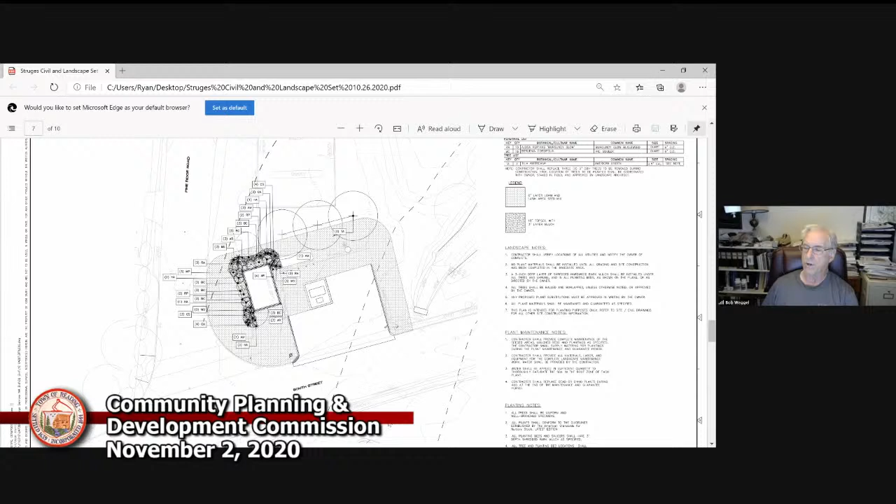You speak of a generator, so does that imply it's a motor generator set, where electric power powers a motor which generates current that powers the pumps? The pumps primarily run 365 days a year, barring any outage on electricity. Do they draw power directly from the line, or from a generator that draws from the line? No, they draw it directly from the power line. So did I mishear the word generator? I thought I heard you use that word. I did - we have an emergency generator.

For when the power goes out, for redundancy. Absolutely, yes - when you need the pumps, you need power, and if you lose power, you're in deep trouble. We have a very short time before it starts to back up and can overflow.

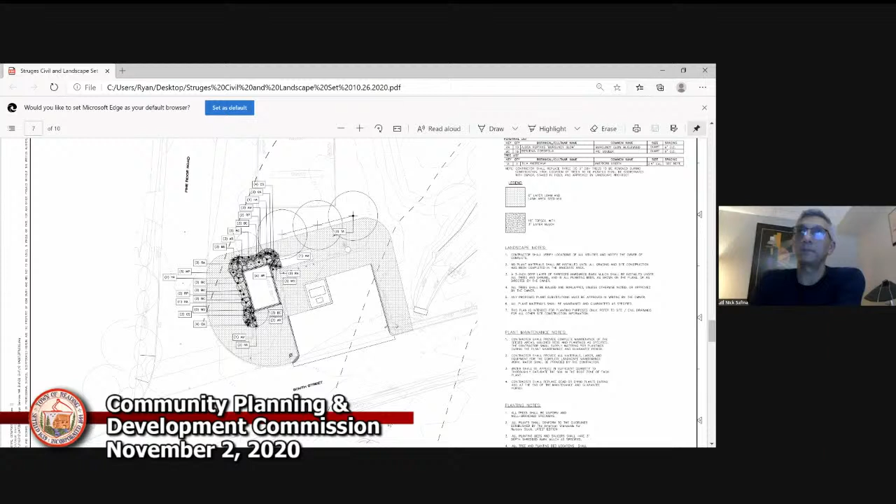All right, so any other thoughts on the item that's really in front of us, which is the pole and the scenic byway or scenic road decision? I have no more comments. No comments from you, Nick? No comments. All right, so we have a decision available.

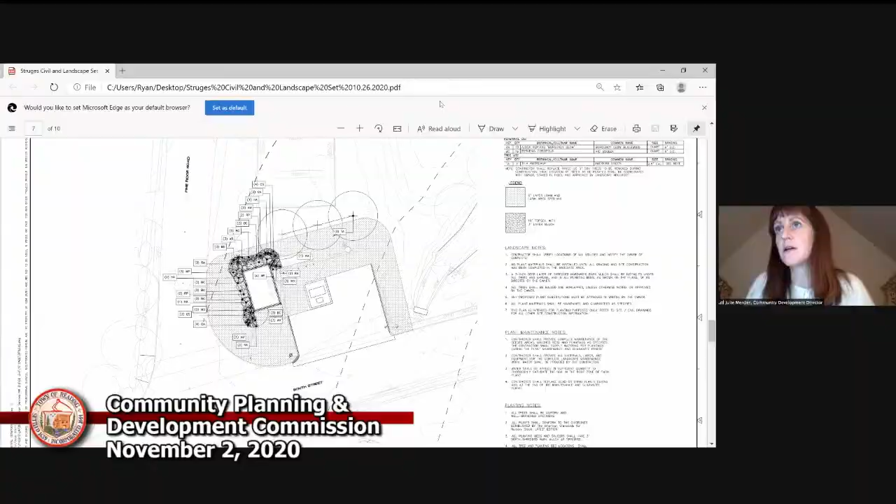Ryan, can you stop your screen share so we can? Yeah, I'll pull up the decision. All right, thank you.

So it's pretty straightforward. I don't think it captured as much detail as Ryan provided on the infrastructure and engineering today, but we tried to capture the summary of the application. This decision reflects that the utility pole triggers the scenic road application, while the sewer pump station was looking for more comment, which we certainly got tonight. I don't know if there are any further conditions that arose from this discussion that the board might feel are appropriate for this application.

I'd like to add the bit about adding a tree, if feasible, understanding there may be constraints - adding another tree, I guess over on the Pine Ridge Road side, if it's feasible.

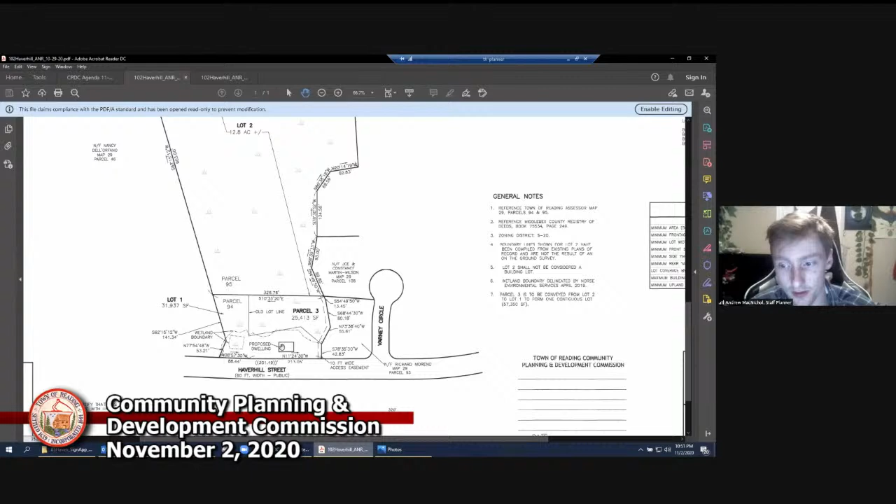The memo is from both planning and engineering. I believe the conservation administrator, who this house is going through the conservation process, also looked at it and agreed that it conforms to what was discussed at the conservation hearings. Yes, that's correct.

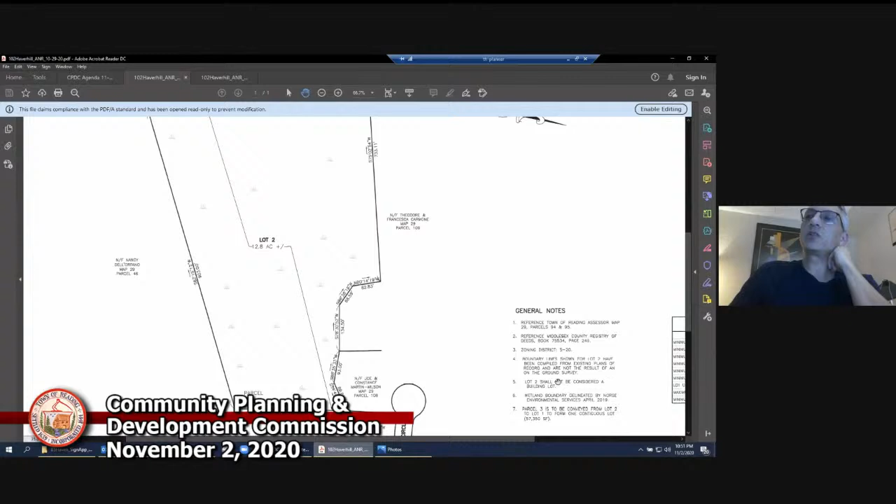So does lot 2 need frontage? Lot 2 is deemed a non-buildable lot per note 5 here. Yeah, that's a question I have actually though - if you look at that note, it says 'not considered a building lot' as opposed to 'buildable lot.' Is there a difference? That's the term they usually use actually, building lot. Okay, they could say buildable lot too, but regardless, they're creating a lot that doesn't have adequate frontage, so it doesn't meet zoning.

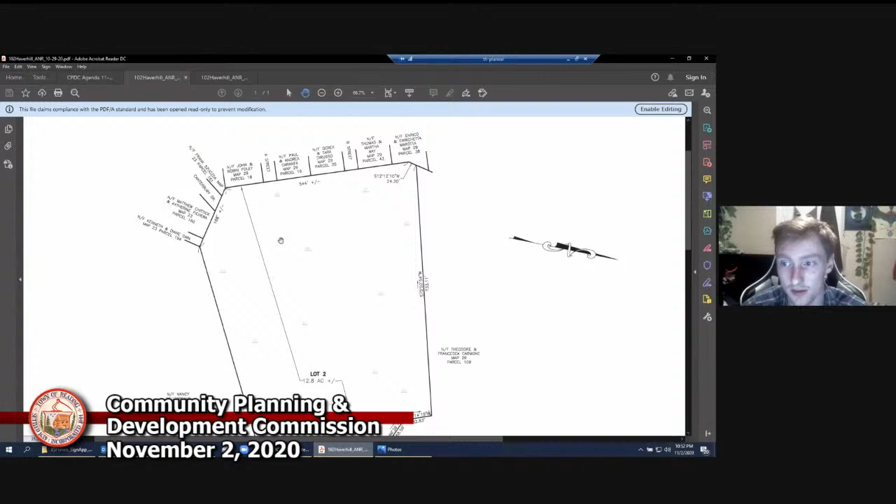There's a few roads up here, but none meet the required frontage requirements of the S20 zoning district. And I believe this lot is to be conveyed to the town in a future conservation restriction as well. I think they're actually just going to deed it to the town under the care and control of the Conservation Commission. Gotcha, slightly different process.

I think as long as that front lot has frontage and area, and the second lot is noted as not a building lot, that's all we need to know. Right, that is all we need to know. And the frontage for both lots isn't changing as well, so it's not changing what it is today. This frontage exists today, yes.

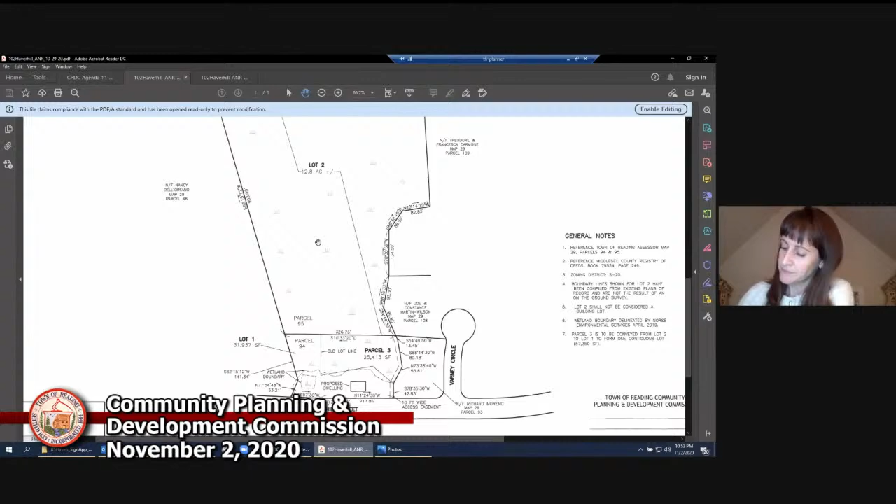All right, questions? No, all right, so moving along. We need a motion to endorse, right? Yes, move that the CPDC endorse the ANR for 102 Haverhill. Okay, I'll second. All those in favor, raise your hand, say aye. Aye. Aye. All right, that's 5-0.

And I just need 3 volunteers for the signature chain. I'm here every day. You might get a visit from one of your friendly Town of Reading staff members. People are starving for human interaction. That might be a 2-way street.

All right, now what's next? So we don't need to talk about zoning since it's almost 11. Right, and we're not going to do meeting minutes. That's a statement.

I did want to share with you 2 instructional motions that were submitted, I believe, last Friday to the town clerk for November town meeting. I'm not super familiar with the instructional motion process except for what I've seen in the last few years, but I'll just quickly get them and show you them. Oh, actually I had them on my screen earlier, but I don't know where they went. Just get them.